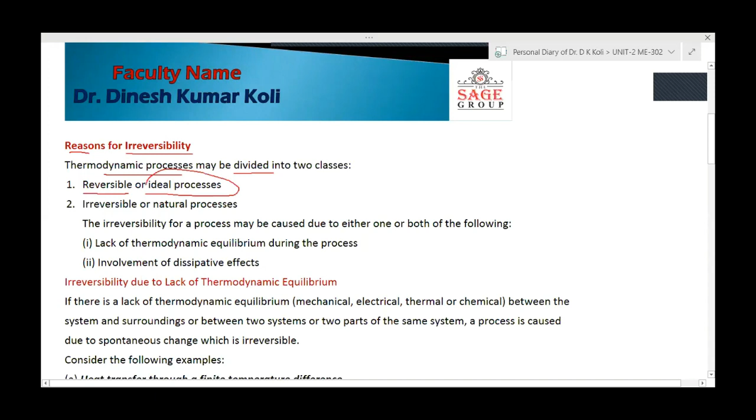We have studied the reversible process as well as the irreversible process. The reversible process is also called the ideal process. Irreversible process is called the natural process, sometimes also called the actual process, or the real process.

As we have seen, no process which is ideal or reversible is actually possible. All processes occurring are irreversible or natural processes. So what are the reasons behind irreversibility of any process? This may be caused due to either one or both of the following reasons. There are two reasons behind it.

The first reason is lack of thermodynamic equilibrium during the process. You have already studied thermodynamic equilibrium, which consists of four types: mechanical equilibrium, chemical equilibrium, thermal equilibrium, and electrical equilibrium. If there is a lack of such thermodynamic equilibrium, it will cause irreversibility in the process.

The second reason involves dissipative effects, meaning the presence of friction in every process. If friction is present, it will also cause irreversibility. There is also viscosity in the fluid, etc. Because of these reasons, the process becomes irreversible. So these are the reasons for irreversibility.

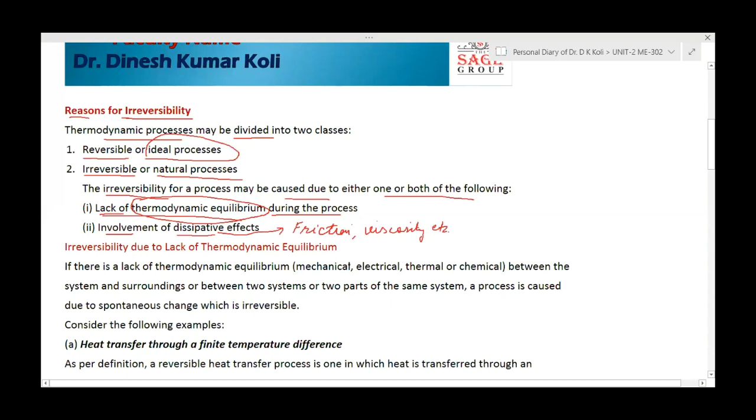Now let's look in detail at how irreversibility due to lack of thermodynamic equilibrium happens. If there is a lack of thermodynamic equilibrium, there may be unbalanced mechanical force or pressure, differences in electric potential, non-uniformity of temperature, or some chemical reaction within the system. If any one of these is present, there is no thermodynamic equilibrium between the system and surroundings, or between two systems, or between two parts of the same system.

Either case may apply: lack of thermodynamic equilibrium may be between system and surrounding, between two systems, or between two parts of the system. A process caused due to spontaneous change is irreversible, and there will be some change in the process.

For example, suppose we have a system here, and this is the surrounding. If there is no thermodynamic equilibrium, suppose there is a pressure difference or temperature difference: in the system temperature is T1, outside the system in the surrounding it is T2, and definitely heat will flow from system to surrounding.

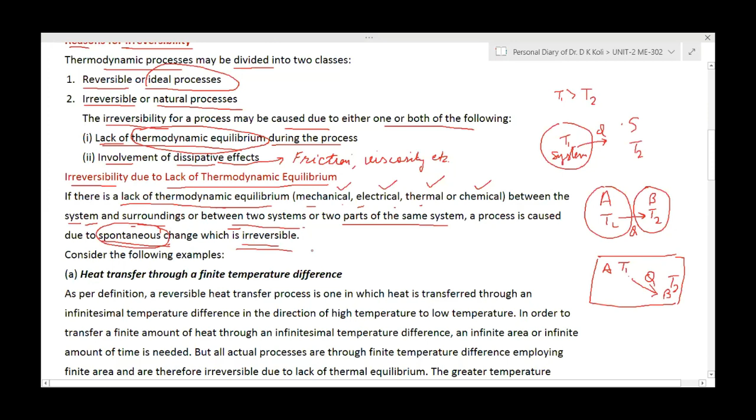Now to understand that in a better way, we are taking some examples. The first case we are taking is heat transfer through a finite temperature difference. Try to understand heat transfer through a finite temperature difference.

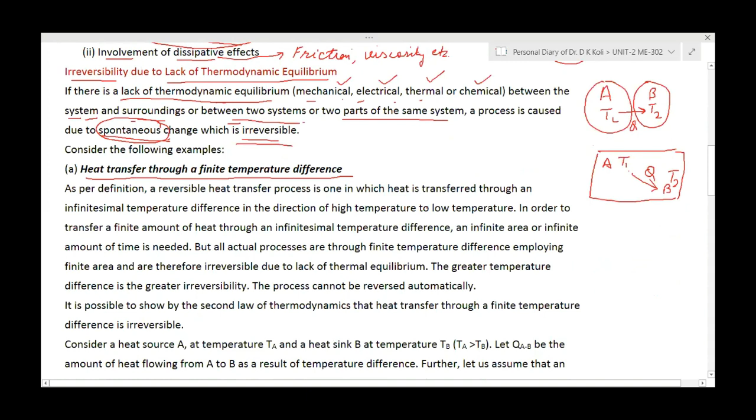As per definition, we know that a reversible heat transfer process is one in which heat is transferred through an infinitesimal temperature difference in the direction of high temperature to low temperature.

As we know, when heat transfer occurs, it always occurs from high temperature to low temperature. But here we are talking about reversible heat transfer. Heat transfer is reversible means the process can be reversed. For that, you have studied the process known as the quasi-static process.

In the quasi-static process, suppose this state is 1, the initial state, and final state is 2. Between these states, there are some intermediate states we have studied. This process is very slow, so it is called the quasi-static process.

It means a system departs from an equilibrium condition infinitesimally. So this quasi-static process, where the system departs from the equilibrium state, is very slow, and this process is closer to the reversible process. It is not exactly the reversible process.

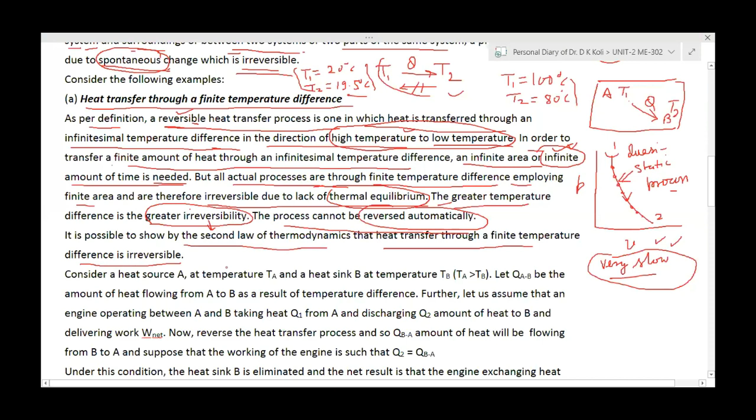We can also show here, using the second law of thermodynamics, that a heat transfer through a finite temperature difference is irreversible. Now we will go on to prove how this process is irreversible from the second law of thermodynamics.

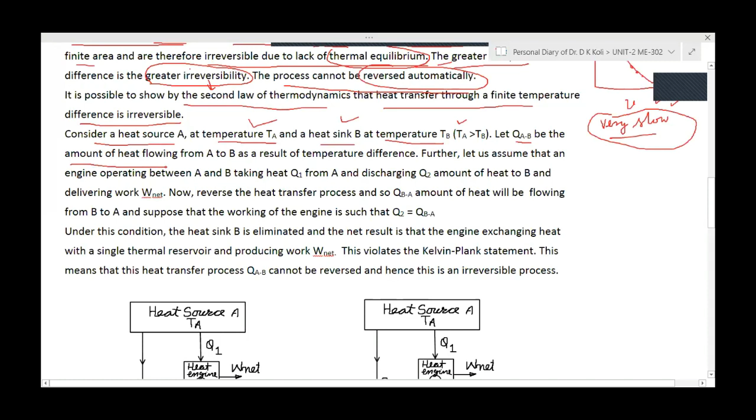So what we are going to take here: consider a heat source A at temperature TA, and a heat sink B at temperature TB. In this case, TA is greater than TB, meaning the heat source has a greater temperature compared to the heat sink. Now suppose Q A to B is the amount of heat flowing from A to B as a result of the temperature difference.

So here you can see this is our heat source at temperature TA, heat sink at temperature TB, and the heat transfer occurring between A and B is QAB. Because the temperature difference is there, and TA is greater than TB, heat will flow, and that heat flow is QA to B. Is it clear or not? Yes sir, clear, yes sir.

Now further, let us assume that an engine is operating between A and B, taking heat Q1 from A and discharging Q2 amount of heat to B, delivering work equal to W net. Here you will see there is an engine, working between the same temperature limits, taking Q1 amount of heat, rejecting Q2 amount of heat to the heat sink, and producing W net amount of work.

In the first case, there is a temperature difference and heat is flowing, that is QA to B, between the heat source and heat sink. Also, if between these two thermal reservoirs we have employed a heat engine which is taking Q1 amount of heat from the heat source, producing W net amount of work, and rejecting Q2 amount of heat to the sink. Is it clear?

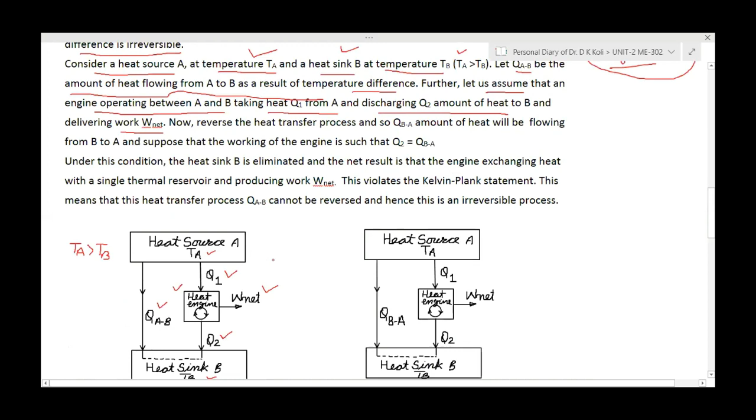Any doubt? No, sir. Now, what we are doing here is just, just to see here what we are doing.

Now reverse the heat transfer process. So Q B to A amount of heat will be flowing from B to A. Now in the second figure, the heat engine is working here. It is taking Q1 amount of heat from the heat source, producing W net amount of work, and rejecting Q2 amount of heat to the heat sink, same as we took in the first figure.

Now here what we are doing, Q B to A. You change this direction. Actually the direction is reversed here, opposite, from B to A, not A to B. Here, heat engine is taking Q1 amount of heat, rejecting Q2 amount of heat, producing W net amount of work. But this Q B to A we are going to reverse, because we are talking about the reversal process.

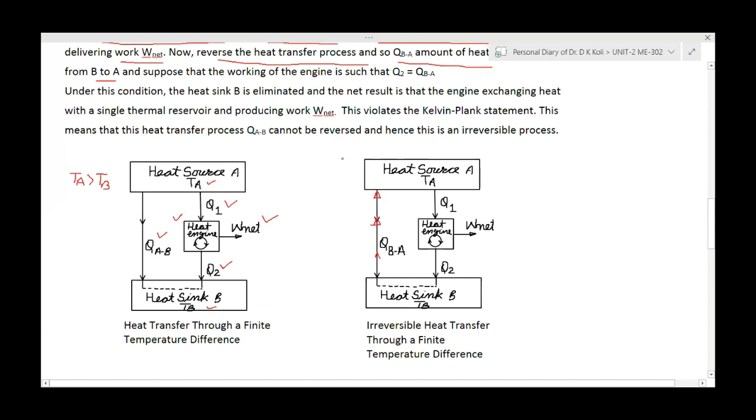Suppose that the working of the engine is such that Q2 equals Q B to A. Now what is happening here? Because this is producing W net, rejecting Q2 amount of heat, and when this process is reversed, it becomes Q B to A. We assume this Q2, rejected by the engine, is equal to Q B to A.

So what happens when these two are same? It means there is no need of heat sink. Then there is no need of heat sink. Is this point clear?

Because this engine is rejecting Q2 amount of heat to the heat sink, and Q B to A we are taking from the heat sink, and Q2 and Q B to A are both same, we can connect these two. It means the heat engine rejecting Q2 amount of heat, if this heat is directly transferred to the heat source A, we can eliminate this heat sink.

Q2 rejection will be transferred to the heat source A. If this is clear to you, it means this whole combined system will work as the heat engine, with interaction of energy only with one thermal reservoir. In that case, this combined system will take Q1 amount of heat and produce net amount of work.

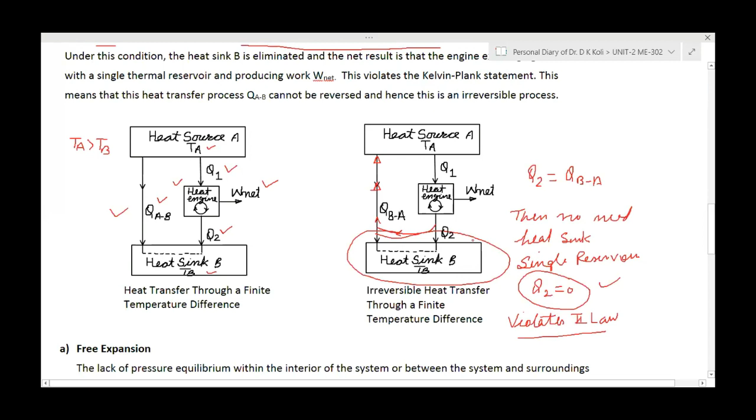Or it says that the process cannot be reversed. So it has been proved that by reversing it, it violates the second law. So it is not practically possible, and this cannot be reversed.

And okay, so the second example we are going to take is the free expansion.

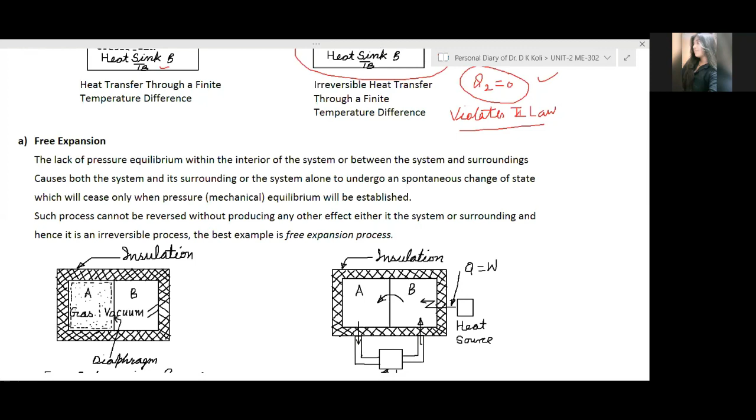Yeah, Ranju Rao, are you going to understand? Yes, sir. Keep speaking slowly so I know whether you all are following or not. Okay, sir. Okay, so now next we are taking the free expansion.

What is free expansion? The lack of pressure equilibrium within the interior of the system, or between the system and surroundings, causes both the system and its surroundings, or the system alone, to undergo a spontaneous change of state, which will cease only when pressure equilibrium is established.

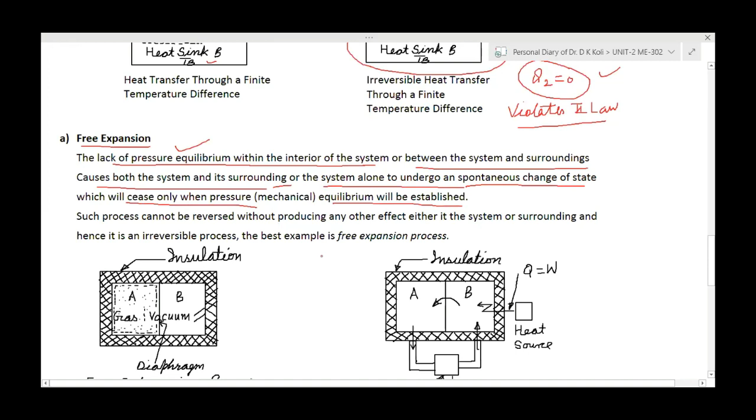Such a process cannot be reversed without producing any other effect, either in the system or surrounding, and hence it is an irreversible process. Its best example is the free expansion process.

So if there is lack of equilibrium in the interior of the system, what will happen? It will cause the system alone to undergo a spontaneous change. There will be some change in the system properties, until the pressure equilibrium or mechanical equilibrium is reached.

We can take an example: suppose your ceiling fan is running, it is throwing out or spreading the air in the room. When the air is coming from some source, because of the pressure difference, air will move from one region to another region.

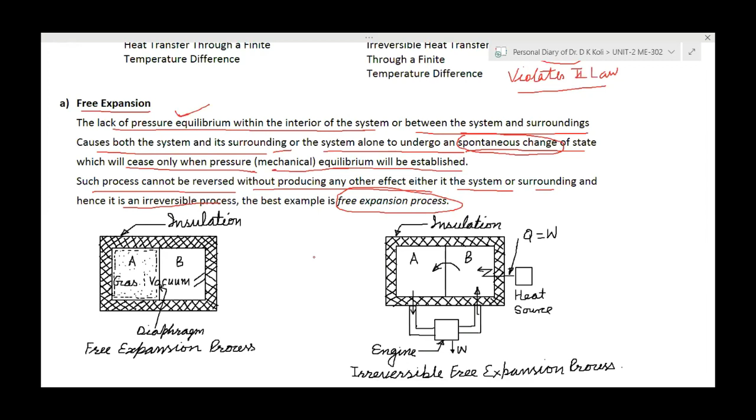But when we stop the running of our ceiling fan, what will happen? Gradually the pressure difference will decrease throughout the room, and after some time the air will be still. That will be mechanical equilibrium. But initially, when the fan is running, there is no mechanical equilibrium, and it will cause spontaneous change in the system.

Now, what is happening here? You can see this is the insulation, and yes, there is a complete system. In one part we have a gas. In the second compartment we have vacuum, and these two compartments are separated by a diaphragm that can be punctured or broken. Initially in compartment A there is gas at some pressure, and in compartment B there is only vacuum.

Now if we puncture this diaphragm or break it, what will happen? The gas from section A will flow to section B, and will completely fill this vacuum until the pressure in section A as well as section B will be in equilibrium. The pressure will be the same.

So it will occur in the forward direction. When we puncture the diaphragm, gas will flow from A to B and occupy the whole space until the pressure is uniform in both compartments. But is it possible that gas from section B will move back to compartment A, creating vacuum again in section B? No, sir. Not possible.

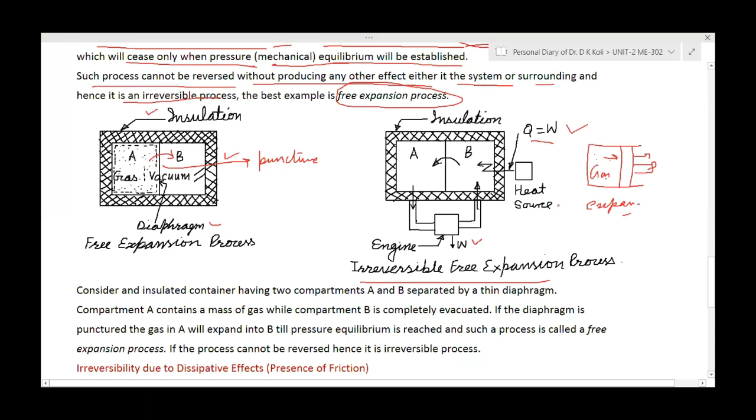So I have discussed the free expansion as well as one more, which is called heat transfer through finite temperature difference. We have discussed heat transfer through finite temperature difference, and second is the free expansion.

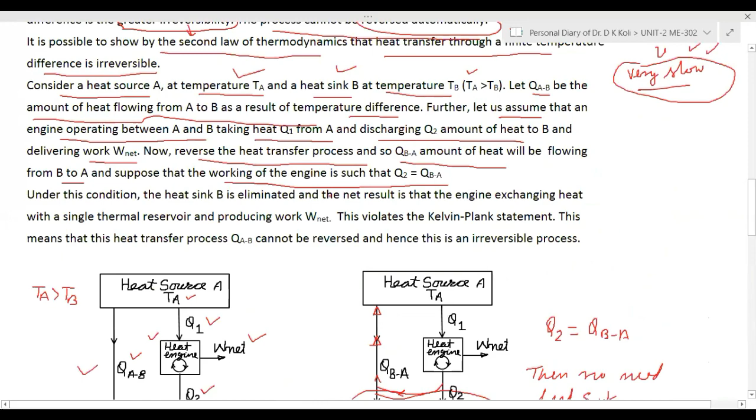Now third, we are taking this, which is also a reason for irreversibility due to the dissipative effects. Dissipative effects mean the presence of friction. Friction generates heat, and because of that, it also causes irreversibility.

So suppose there is some arrangement, this is the piston and cylinder arrangement, and this is some gas, our system. Consider the case when the gas is going through expansion. In expansion, this piston will move rightward, and when this piston moves, between the cylinder and the inside surface there will be friction, and this friction will generate heat.

Let this heat generated be plus Q. When expansion occurs, this heat generates plus Q. Now suppose we are compressing the gas. During compression, again there is friction, and it generates heat, again plus Q. So if during expansion the heat generated is plus Q, then during compression this heat should be minus Q, absorbed, for the process to be reversible. But what happens is that in both directions, expansion or compression, heat generation is always there, and this heat generation changes the property of the system because it transfers heat inside the gas.

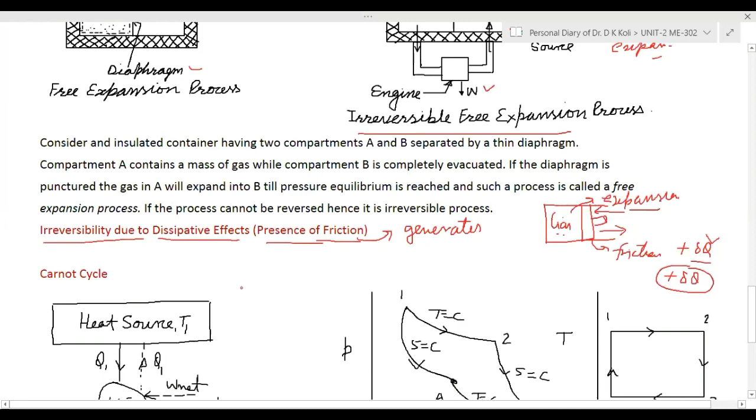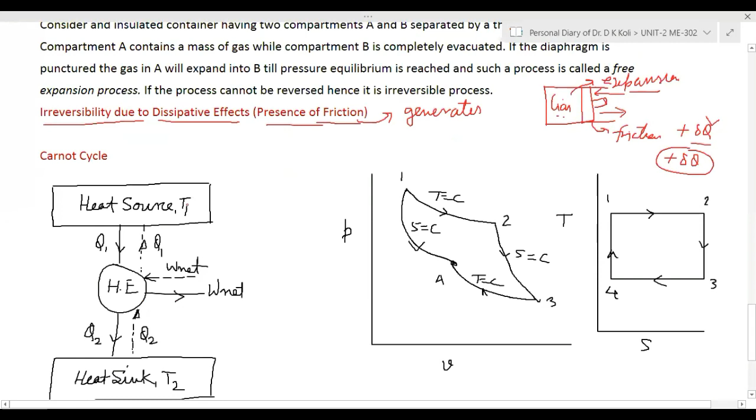Now we are taking the cycle, this is called the Carnot cycle. We are going to discuss the Carnot cycle here, and draw its PV and TS diagram, but before that you have to understand what a Carnot cycle is. So let's see the schematic diagram for the Carnot engine.

There is a cylinder and a piston. This cylinder is a perfect conductor as well as a perfect insulator. This cylinder consists of... just one second please.

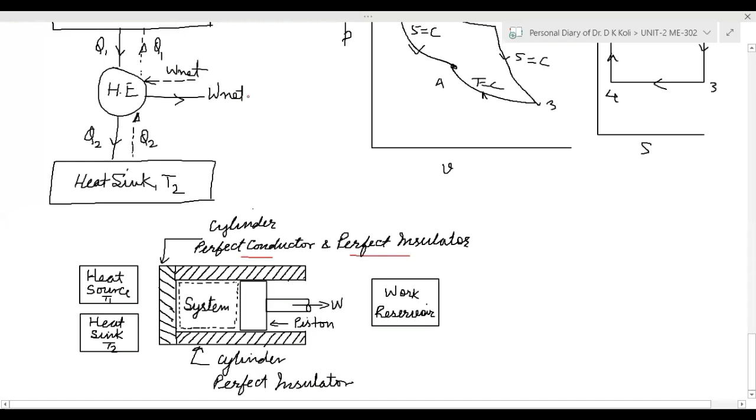Okay, so here you will see what is the Carnot cycle. But before that, you have to understand what is the Carnot engine. The Carnot engine consists of a cylinder and a piston. This is some system having some working substance.

The structure of the Carnot engine is that this cylinder is perfectly insulated, and here we are having the heat source at temperature T1, and heat sink at temperature T2. This heat source will supply the heat; if this heat supply is Q1, the heat sink will take heat at temperature T2, and this heat rejection is Q2.

This portion of the cylinder head is a perfect conductor as well as a perfect insulator, and this other portion is the perfect insulator of the cylinder. So we see how the heat transfer and heat rejection take place in the Carnot engine, including the work reservoir where we can store the work produced.

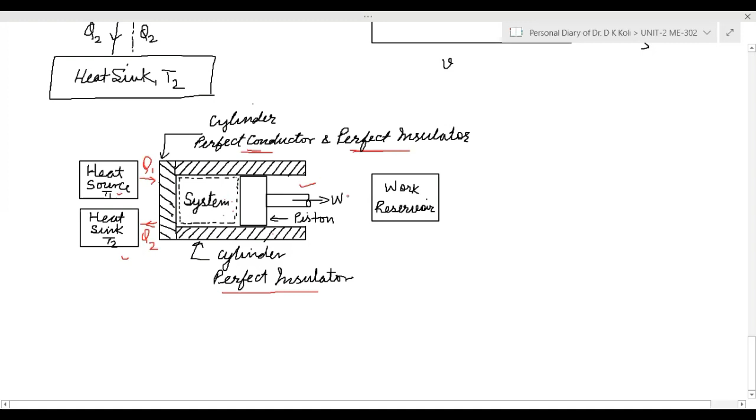This Carnot cycle or Carnot engine consists of four processes, which can be shown on the PV diagram as well as the TS diagram. If you see the PV diagram, 1 to 2 is the reversible isothermal process at higher temperature T1. 2 to 3, where S equal to constant, is the reversible isentropic process.

Then 3 to 4 is again an isothermal process, T equal to constant. And 4 to 1 is again an isentropic compression. So: 1 to 2 reversible isothermal process, 2 to 3 reversible adiabatic expansion, 3 to 4 isothermal compression, and 4 to 1 reversible adiabatic compression.

So just try to understand what process is occurring. Here you can also see it is a heat engine. The Carnot engine is a heat engine; it takes Q1 amount of heat from the heat source, produces W net amount of work, and rejects Q2 amount of heat to the heat sink.

Okay, are you getting it or not? Yes, sir.

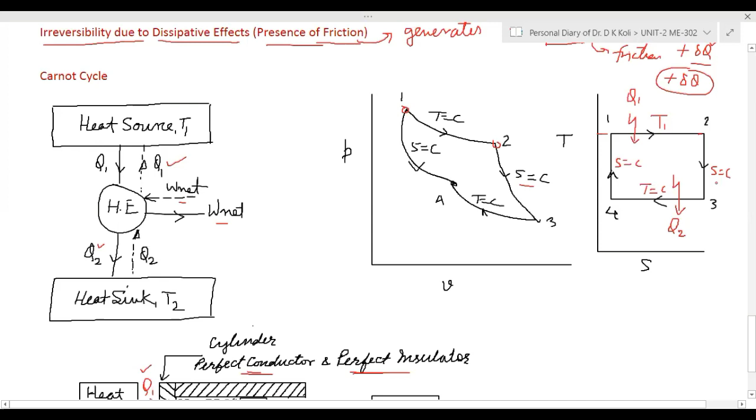Now in process 2 to 3, this is the isentropic or reversible adiabatic expansion process. In this process, if S equal to constant, Q will be equal to 0 in the reversible adiabatic process, meaning there is no heat transfer. If there is no heat transfer, the cylinder should be insulated. When it is insulated, the insulation allows no heat to transfer. So the insulation is made here because in this reversible adiabatic process, 2 to 3, transfer of Q equal to 0, there is no heat transfer. Got it?

There is no heat transfer, the cylinder is insulated from all sides. The piston will move back and compression will start. So compression will be from 3 to 4, the constant temperature process. It will occur at constant temperature and heat will be rejected here to the heat sink, so this cylinder material will be conductive.

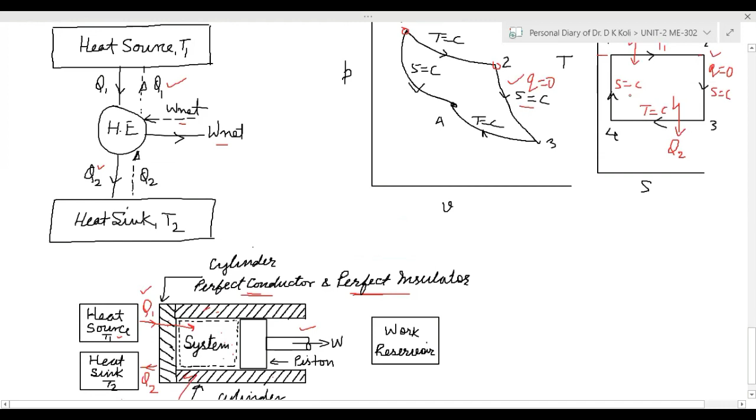In the last process, 4 to 1, it is isentropic compression. When S equals constant, it's a reversible adiabatic process, so Q will be equal to 0. There should be no heat transfer. So there are four processes: one is isothermal, temperature remains constant; second is reversible adiabatic, no heat transfer; third is again isothermal; and fourth is again adiabatic process.

Now what is the need? In process 1 to 2, this material should be conductive so that heat can be transferred. In process 2 to 3, all the surface should act as an insulator, heat should not go outside. In the third process, the surface should again be conductive. In the fourth process, the surface should be insulated.

So for the working of this Carnot engine, it requires that the cylinder material should be made of a material which is a perfect conductor as well as a perfect insulator. A material which is a perfect conductor - perfect conductor means all the metals are conductors.

So the material should be a perfect conductor as well as a perfect insulator. These two properties are required in case of the Carnot cycle, for the cylinder material.

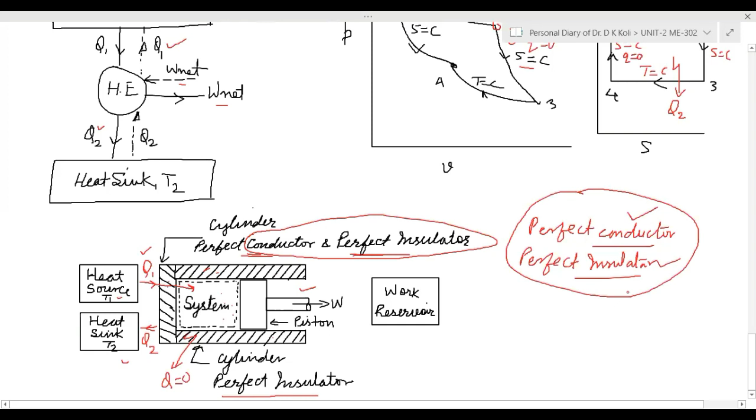In the case of 1 to 2, which is the constant temperature process, in this process we are adding heat Q1. So if we are adding heat to this process 1 to 2 at constant temperature, we need that we are adding heat, but the temperature should not change.

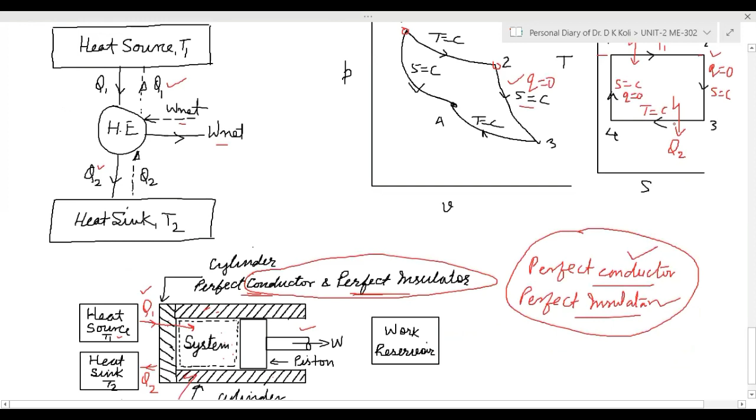Very, very slow. See, the process 2 to 3. In this process, Q should be equal to 0, there should be no heat transfer, meaning the cylinder should be isolated from the outside so that heat should not escape.

In the second part, if the process is very fast, it will not allow time for heat to go out. So process 2 to 3 should be very fast. Again, 3 to 4 isothermal should be very slow, and 4 to 1, which is reversible adiabatic, should be very fast. So the process should be very slow, very fast, very slow, very fast.

Can we run our piston in that way - moving very slow, very fast, very slow? Is it feasible? Is it possible? No sir, it is not. These are the drawbacks of the Carnot cycle.

Because of that, actually, if it were possible, it would give maximum efficiency. That is possible by the Carnot engine, but there are some practical difficulties. We cannot manufacture such a material having properties of a perfect conductor as well as a perfect insulator. The piston cannot move very slow, very fast, very slow in that manner. So because of such difficulty, it is only hypothetical, not a practical one.

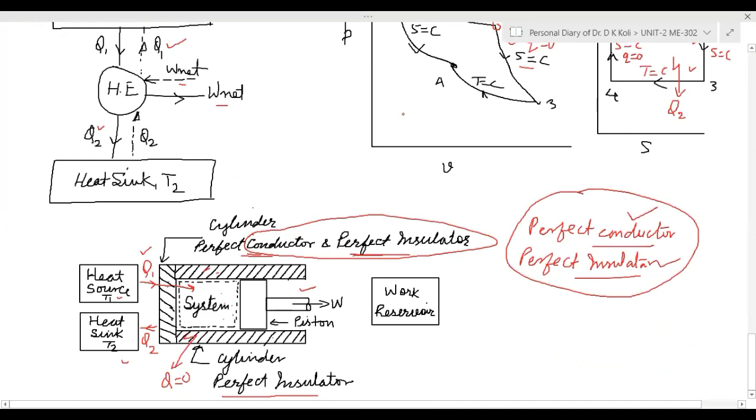So the concept is made clear. This is the T-s diagram you can draw - this is the PV diagram showing all the processes, and this is the diagram we have already shown for the heat engine showing the two temperature reservoirs. Is it clear?